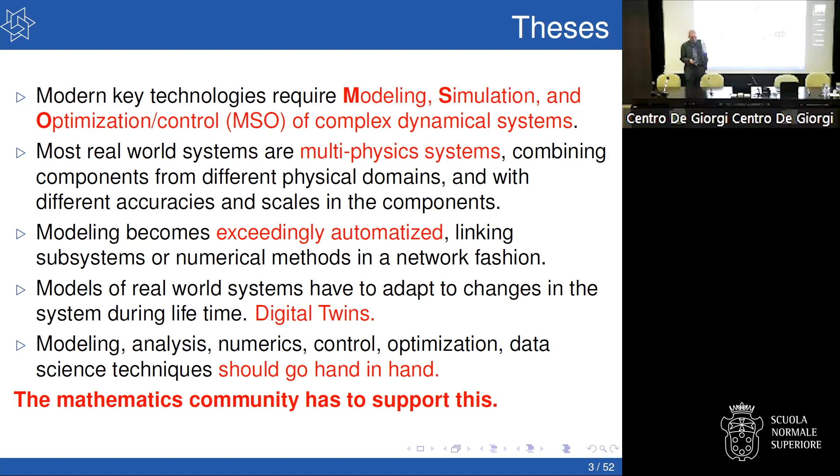In order to deal with all these things, I think we need to work more together in the math community between modelers, analysis, geometry, computational methods, and also data methods. And my obsession is that I try to convince the mathematical community to work together. So here's one of my favorite topics. We have nowadays the energy sector, and in particular, since exactly 1 year ago, it has become really important, even more important than we thought.

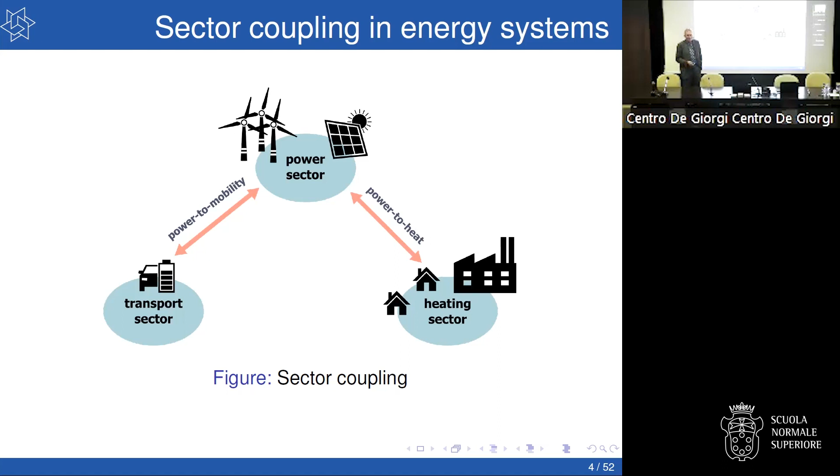That is, we have to couple different energy sectors. So there is all the green energy, wind and solar power, and then there's a classical sector like power plants with gas or coal or whatever, nuclear. And there's also nowadays, with all these electric cars, the transport sector. And this doesn't fit together. So at the moment, there are lots of obstacles that we have to overcome.

So what are the challenges? First of all, we all want our energy to come out of the socket, so the energy supply should be there. You have to couple different energy sectors, wind, solar, and they behave totally differently. Maybe not so much in Italy, but in Germany, the sun is not always shining as much as in Italy. They have different modeling accuracy, and they live on different time scales.

So the electrical system lives on a millisecond to second time scale, while gas transport has a time scale of a bike, roughly a speed of 15 meters per second. And we have to deal with increasing randomness, because the wind and solar power system becomes random, and decentralization. If everybody has a solar panel on the roof, they are not only consumers of electricity, but also producers of energy.

And so we need dynamical approaches. At the moment, for example, the power system is completely stationary. It's run on a stationary model. Okay, so we need new mathematical approaches. And I will not talk about the power system. I will talk about the gas transport system, even though we've essentially stopped transporting a lot of gas, but it's much more developed, and also there are nicer partial differential equations there.

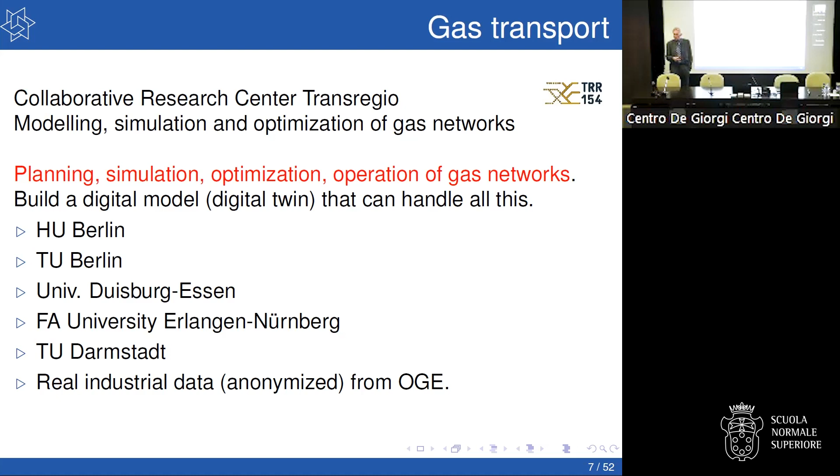So this is a joint research project, a big one, together with 5 universities, like a center of excellence, between Humboldt University, Technical University, University of Erlangen-Nuremberg, TU Darmstadt, and we get the data from an industry partner. It's Open Grid Europe, which is one of the biggest gas transport companies in Europe.

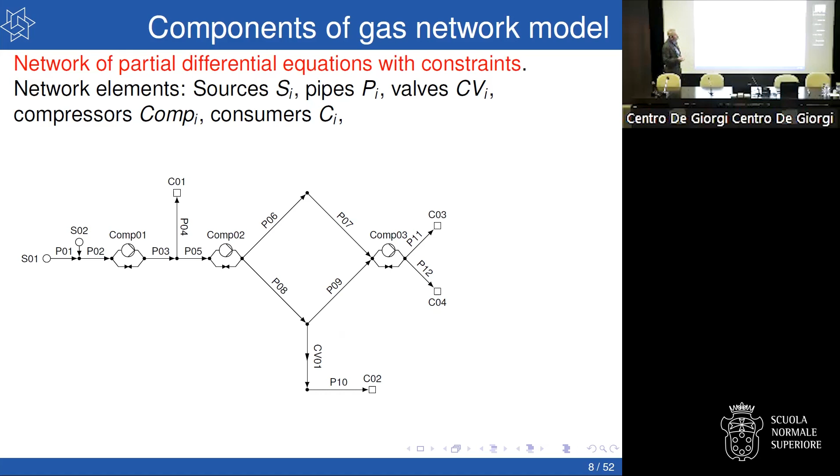So what is such a gas network? A gas network is a network of partial differential equations with constraints. You have these pipes, and on each pipe you have gas flow. And you have sources, so somebody pumps in gas and it's transported. You have compressor stations because due to friction, the gas gets slower and slower, and then you use energy to increase the pressure. And you have valves, so it becomes discrete. You can close and open a valve. This continues, and you have the consumers, which at the end have it in their household to heat.

And you also have something else, to bring the modern world into the game. This is a compressor station. It's a huge building at the border between Germany and Czechia. And what this whole thing does is nothing else than, based on certain parameters, it follows a curve, the curve for the pressure and the mass flow in the pipes. So it increases or decreases the flow.

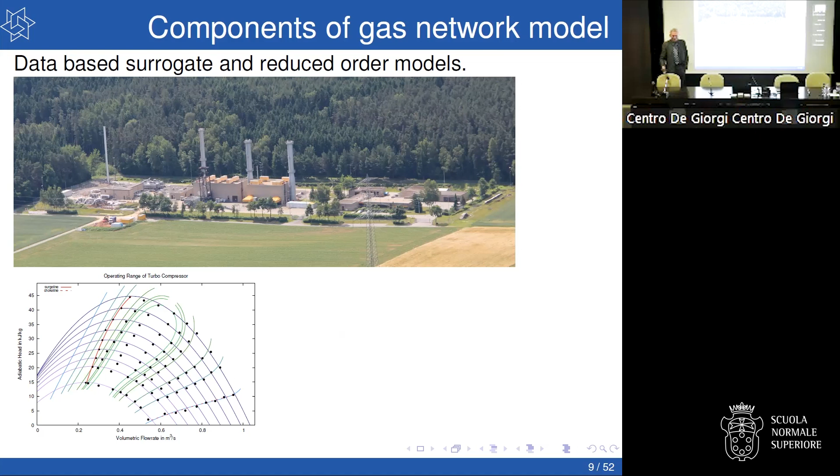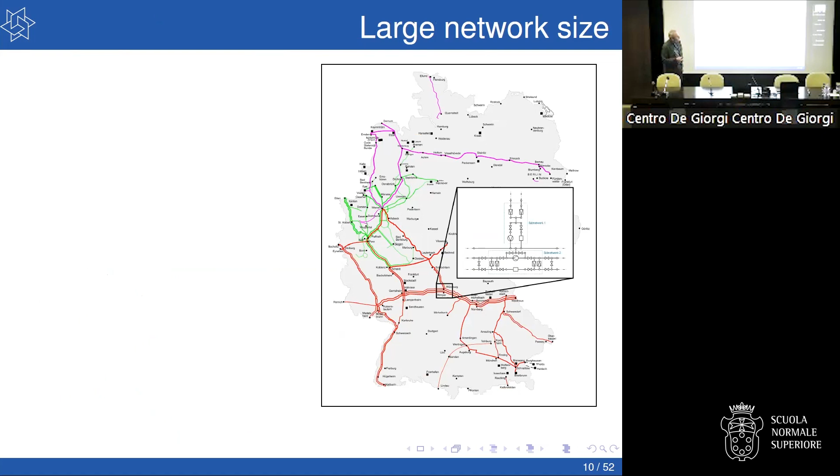And then you have the network, the transport network. These are the big lines in Germany. Each node in this graph is another graph, and each node of that is another graph. So if you think about it, it's a really huge, complicated network. And on each of these nodes, there's a partial differential equation. Now you ask which partial differential equations.

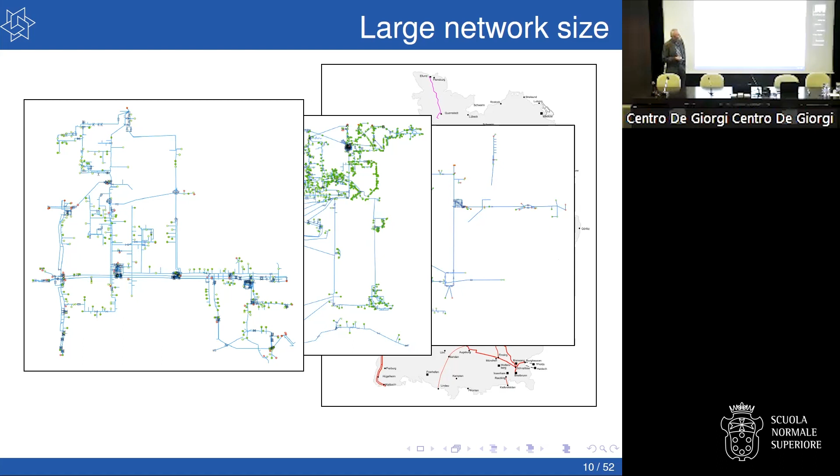But if we went to 2025, we would have hydrogen. A lot of the green energy produces green hydrogen, which in principle you could add into the gas networks. And then you would have to make sure that it doesn't demix, and then you would have to do it all in 3D.

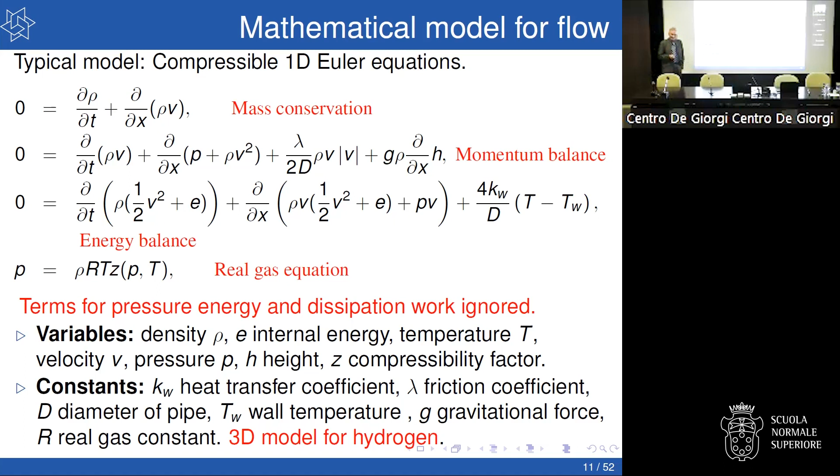So the hydrogen and the methane doesn't mix. So this is a system of partial differential equations, which is on every node, plus all the other components. So we're getting worried, right? And actually what we are doing is we not only have the full model that I showed you, but we also have simplified models. So we have this so-called model hierarchy.

So on top of the Euler equations, then we also have the isothermal Euler equations. We assume temperature is constant. We say that the space derivative of rho v squared and rho v cubed is small. So then we get to a slightly simplified model. We could assume that d/dt rho v is small, simplified nonlinear equation. This is not done, by the way, by asymptotic analysis. It's just simplification by dropping terms.

And you could look at the stationary model, and you could also say that this real gas factor is constant, and then you get a completely algebraic model. And then on top of all this sits an optimization method which uses discrete optimization, and they can't even deal with this algebraic equation. So it's approximated by piecewise linears. So this is a model hierarchy, and there's always an isothermal one. And every element of a node is modeled via this hierarchy.

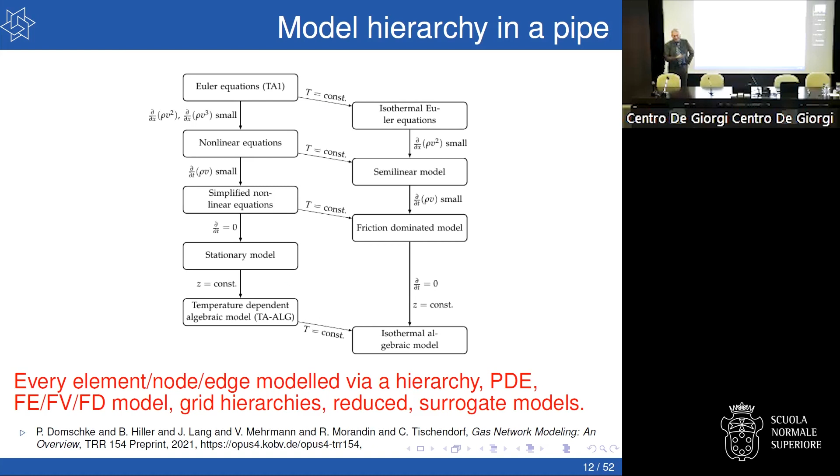So it's a PDE, one of these, and finite element, finite volume, or finite difference approximation in space, and then in time. And we also have reduced models. So if you are interested, there is a huge paper with all the details of all the equations and all the quantities in there, and it's permanently updated. So this model hierarchy is there. So it's a great playground.

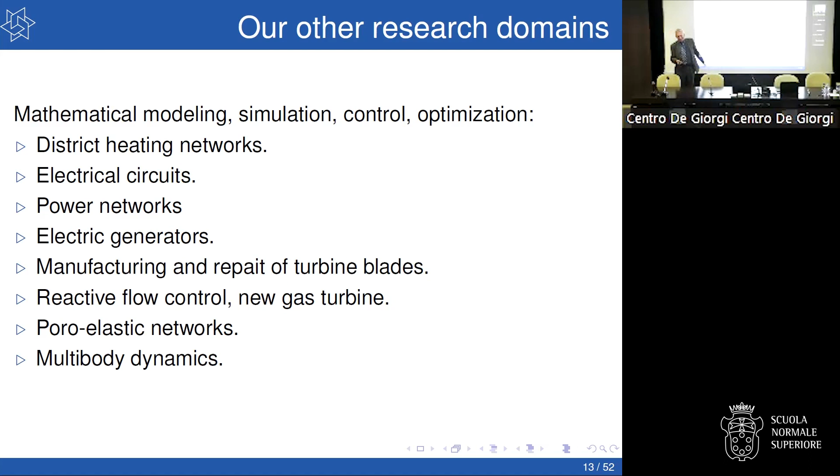We're not only doing this gas transport, but we also look at district heating networks. Then you have incompressible Euler equations, which adds another difficulty. We also look at electrical circuits, power networks, electrical generators, and manufacturing repair of turbine blades, and brain models, and multi-body dynamics. And you look at this and you say, come on, you can't work in all these areas, right? The nice thing is the mathematics for all these can be put in one framework. And this is what I would like to talk about.

So a couple of years ago, we sat in our coffee room, it was shortly before Christmas, and we said, let's make a wish list. What do we want our model class to look like? So we want it to be close to the physics, for closed systems, so separate from the environment, and open systems. We want representation so that we can couple different parts over different physical domains. And the model class should have, we are mathematicians, nice algebraic, geometric, and analytical properties. And the model should be easy to analyze concerning existence, uniqueness, robustness, stability, uncertainty, errors, and so on.

I started out as an algebraist, and I like normal forms, so I also added that we want to have local invariance principles, and it should be good for discretization, so space discretization, time discretization, and we want to do simulation, control, and optimization. And the question is, is there such a jack of all trades? That's the English word. In German, we have a wonderful animal. It's called the eierlegende Wollmilchsau. It's an egg-laying wool milk sow. It's a perfect animal which gives you everything that you need. And so I like this word, and it fits very well to this.

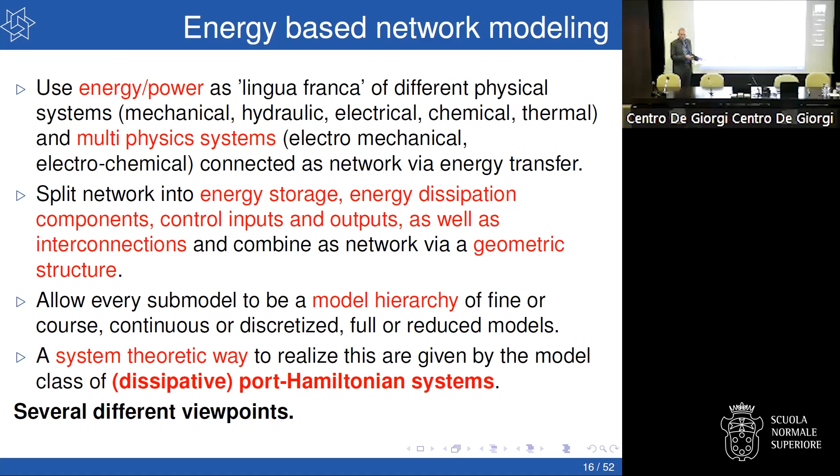And this gives you this so-called class of dissipative port-Hamiltonian systems. And I will give you 2 major viewpoints of this, a geometric one and a differential equation one, and I will show you how the 2 are interrelated. So a classical port-Hamiltonian system as it was defined in work by Arjan van der Schaft from Groningen. And there's a nice book here, a course that you can download, where this is all written up to model all these different components in this way. It has the following form.

It's a nonlinear ODE, x dot equals J of x and t, and J describes the energy flux between storage elements, and J is skew symmetric, or skew Hermitian in the complex case. Then we have a minus R, and R is a positive semi-definite matrix function which describes energy loss or dissipation in the system. And then we have the gradient of an energy function, that's the Hamiltonian. And it describes the distribution of internal energy among the energy storage elements. So that's the classical Hamiltonian concept.

And then on top of the classical Hamiltonian framework that we know from elementary courses in physics, you have ports. Ports are inputs, so U is input. And then in front of the ports, we have one time B minus P and the other time B plus P. And so the input and the output have the same dimension, and you may even have a term which goes directly from the input to the output that's split into its symmetric and skew symmetric part. So I wrote it down here in the ODE setting, but all these could be differential operators.

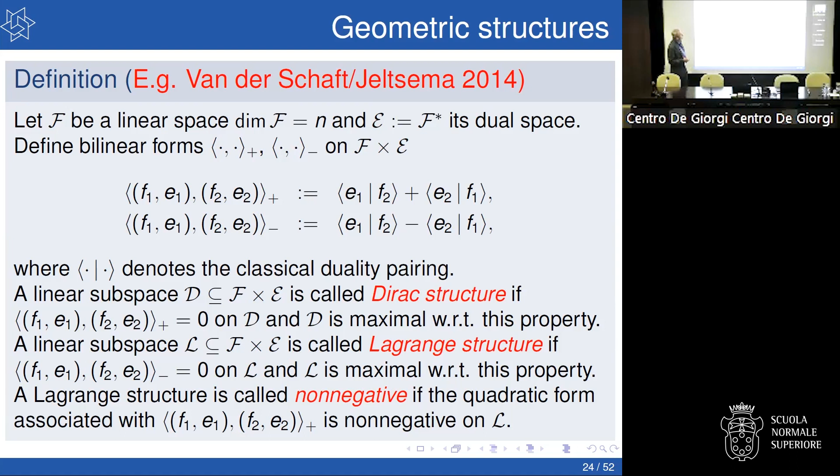Then you can make an abstract definition of this stuff that I wrote down in a differential equation in the following way. So I have linear spaces, a state space X, a space of resistive flows. These are the flows which are run through a resistor or dissipating. A space of external flows, these are the ports, and you take their dual spaces. And then such a Dirac structure looks like this. It's a Cartesian product of X and its dual, the ports and its dual, and the resistive part and its dual.

And the Lagrange structure, which describes, so this describes power transportation from one part of the system, or energy transportation from one part to the other. And the non-negative Lagrange structure is just a part of this resistive system here that describes energy dissipation.

And abstractly, you could write such a port-Hamiltonian system like this. It's X dot X, FP, EP, FR, ER. There exists something in the dual formulation such that XX star is Lagrangian and FR, ER is resistive. So this is a way of writing it with relations and with form. And this can also be done in the nonlinear case with a modulated structure so that the functions depend on the state, and then you get what I wrote down there before in the differential equation framework.

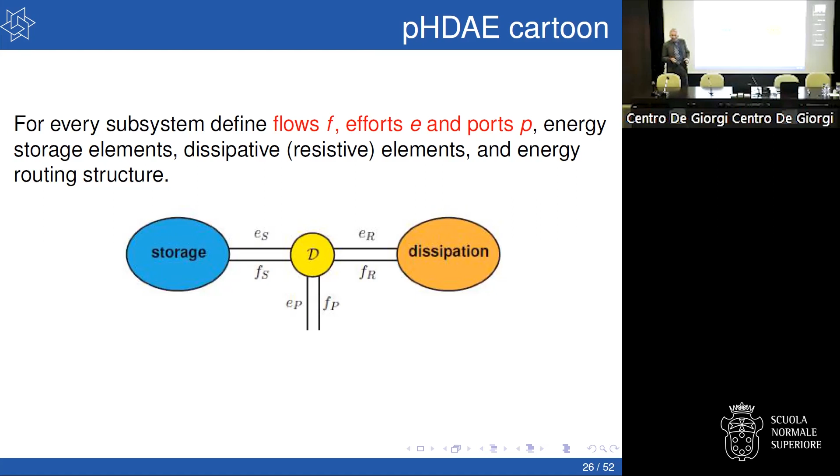And there are the resistive efforts and flows, and then the port efforts and flows. And so this is how you build the system. There's always components, and you interconnect them with such a geometric structure. And that you do in a Lego-like fashion. So let's recap this. This was the definition that I had before. Same definition. And now, how are they related?

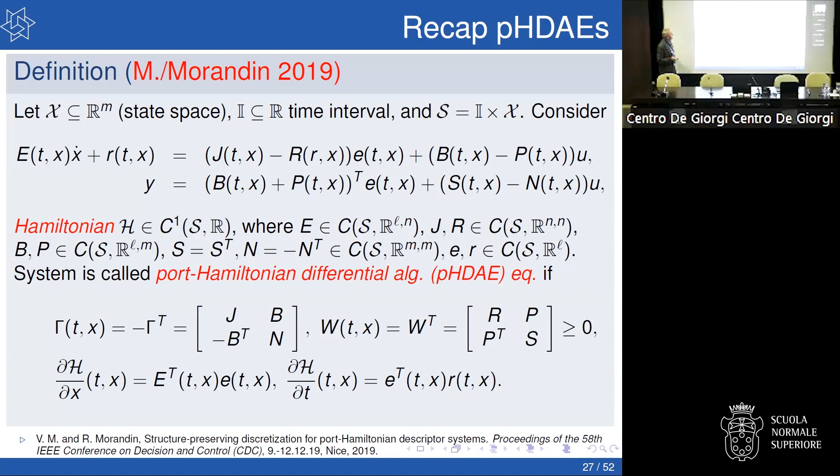So you can show that given an autonomous PHDAE in this form, you define the flow fiber, which is the storage fiber, the port fiber, and the resistive fiber for all x, where the flow fiber is described by E of x times, so I don't have a t because it's autonomous, is the tangent space at x. That's the storage fiber. The same thing for the port flow fiber and the resistive fiber. Then you divide your F, your flows, into these three components, and your E's into these three components.

And then the corresponding Dirac structure associated with the differential equation that I wrote down, there is all these F and E, which live in Vx cross Vx star, which satisfy such a relation. And you see here, gamma is skew-symmetric. You have a skew-symmetric matrix which maps the F's into the E's.

And this is a Dirac structure, and you define Fs to be Exx minus Exx dot, Es to be Ex, Fp to be Y, Ep to be U, and Er to be minus W times Fr. And then you get exactly the differential equation framework. And this inner product between the effort and the flow, this is really the power balance equation. So you have this geometric framework, you can translate it into the differential equation framework, and the physics in the background is all there.

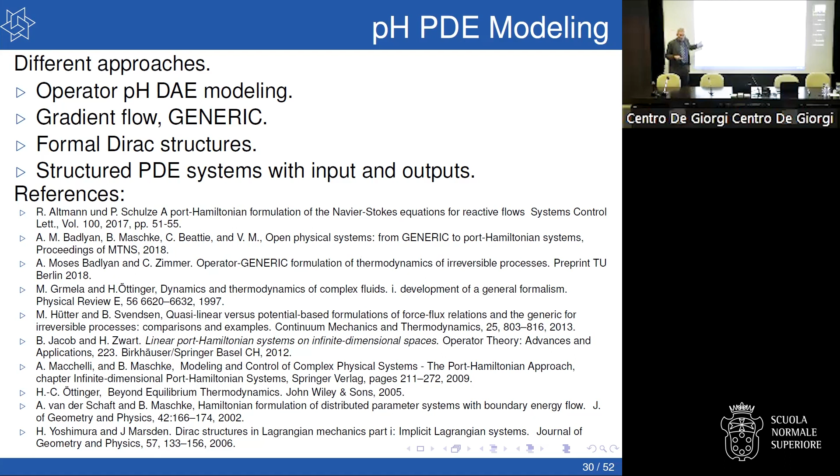So then you want to go to PDEs. Now, there are different ways to do this. So first of all, you could just say, okay, these matrices are now operators, linear or nonlinear operators, and that's one way. Then there is, in the thermodynamic community, a thing called GENERIC. These are gradient flow systems, which would give you a different way. You could also look at formal Dirac structures, or you could look at structured PDE systems with inputs and outputs. And I can provide the slides, so there are references.

So in the linear case, it would look something like this. You have a generalized state variable Z, you have operators J and R, and you have the gradient of the Hamilton function, and you have an input operator and an output operator, which is a formal dual. So J is skew-adjoint, R is self-adjoint semi-elliptic, and the input and the output are connected in this way. And E of Z is the relative energy, which is only a conserved quantity if there's no dissipation and no entropy. And if you want to do thermodynamics, you have to incorporate entropy equations.

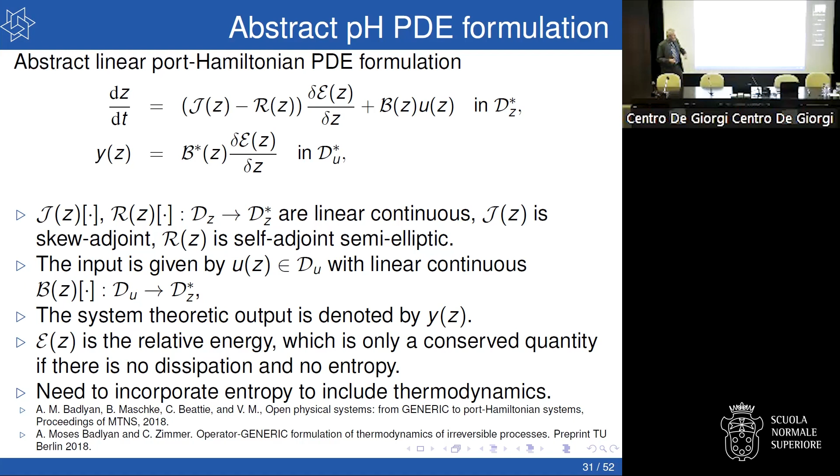So there's some work how to rewrite this. So now let's go back to our Euler equations in the gas transport. Are they port-Hamiltonian in this framework? No. Why not? Well, between Euler and what is now used in gas transport, people have been dropping terms. So these red terms, which is the pressure, energy, and the dissipation work, is usually not considered.

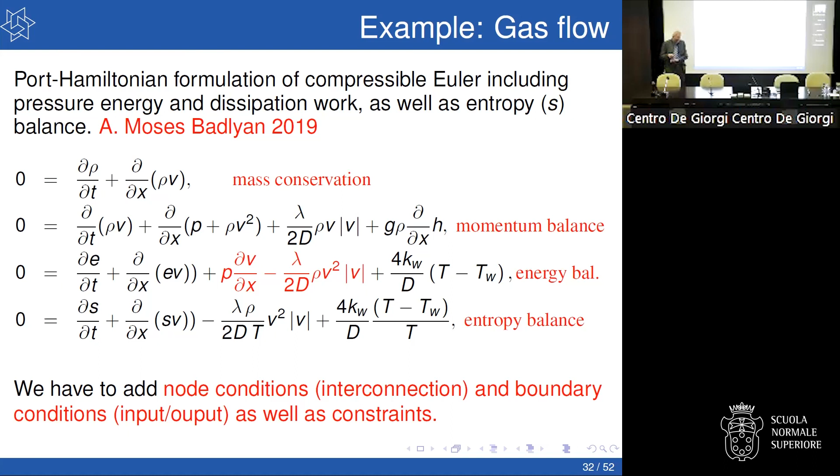But they give you the symmetries. So if you leave them out, the nice symmetry structure is destroyed. And also you need to add an equation for the entropy balance. So if you write it like this, you can prove that it fits into this framework perfectly nicely. We have to add node conditions, so for the interconnection, and boundary conditions. And the boundary conditions, I will talk about this in a second. The boundary conditions are a problem.

So there is no uniform way to deal with the boundary conditions. So classically in PDEs, we want the boundary conditions to make sure that our system is well posed, that we get a unique solution or things like that. Here, the boundary conditions also should reflect this geometry and this symmetry structure.

So, for example, in the gas flow model, the wall temperature boundary condition, so this temperature at the outside, that could be a classical boundary condition for the PDE, or it could be that I want to interconnect with the environment because all these pipes heat up the environment, and then it would be an interconnection variable. So this is different. And the inflow and outflow boundary conditions, they're controls and observations, but they can also be used for interconnection if you have two pipes that come together, and then you put a continuity condition there.

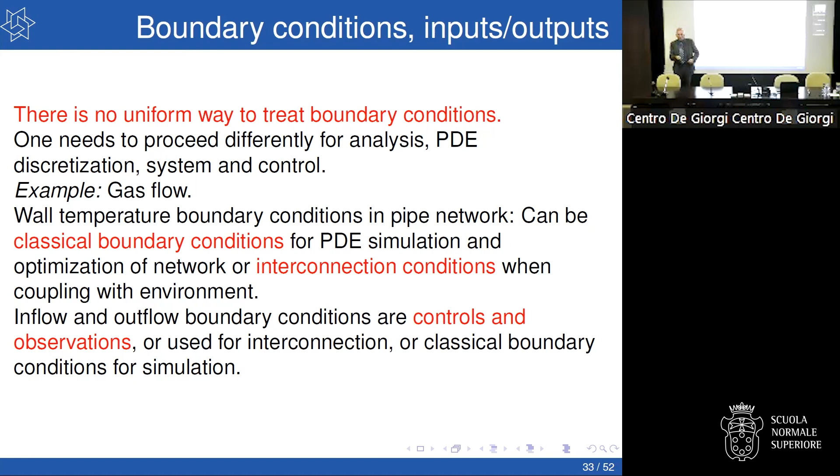Let me go to space and time discretization. And space discretization is surprisingly easy. You do whatever you do for your PDEs anyway, finite elements, weak formulations. Galerkin keeps the structure. So that's easy. But you could also, that is currently a hot topic, use exterior calculus. So go to the representation in forms and use the de Rham cohomology.

And the hard part is, again, the boundary conditions, that you get them right in this framework. That's what we are currently working on together with Andrea Brugnoli, who is a postdoc at the moment. But there are also hybrid approaches which mix this exterior calculus and the classical framework. I'm not going to talk about this part, but it's much easier than the time discretization.

The time discretization is so difficult because most classical ODE or DAE methods do not preserve the energy or the dissipation inequality. So you need something like symplectic methods to keep the geometry. But unfortunately, to preserve the Dirac structure, you would have to use some symplectic methods. And to preserve the constraints, you would have to use something which is called stiffly accurate methods. And there is no symplectic stiffly accurate time discretization method. So you have to do something special.

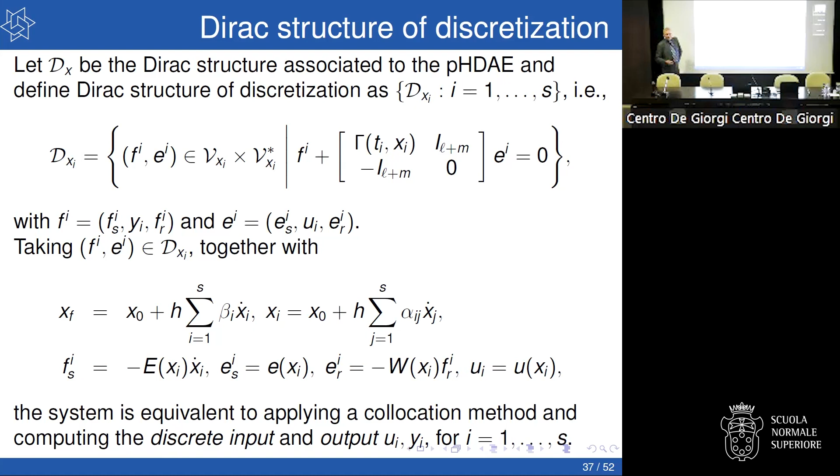So in this last term, you could have trouble, because if the discretization has the wrong sign in this O of h^(p+1) term, then you could get a little bit of dissipation or gain a little bit of energy. But if you use the Runge-Kutta method with positive coefficients, then you really get that this is less than or equal to 0. And if the Hamiltonian is quadratic, then it's even exact. So that's also nice.

I can't resist to put in a little bit: does it help us anything for the linear algebra? And the answer is, when you do a space-time discretization method, you get a nonlinear system or linear system. And it's a large-scale problem if it's a discretized PDE. And does the PHDAE structure help?

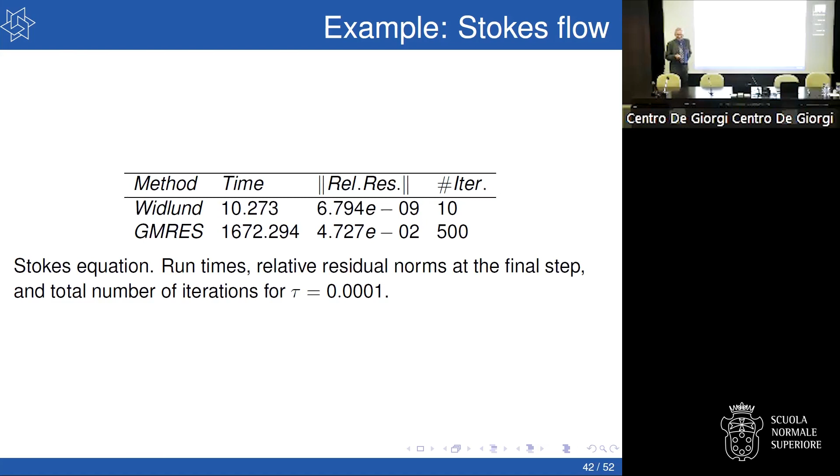So here's an example. This is Stokes' equation. These are the runtimes. If you run Widlund's method, this is what you get, versus the classical non-symmetric generalized minimal residual solver. Here we get an accuracy of 10 to the minus 9, and here it's 10 to the minus 2. You need 10 iterations and 500 iterations. It gets better if the step size is smaller. So if you get more accurate in space and time, then the iterative method gets better because the skew-symmetric part is getting smaller.

So, to come to the end, we've been using all this machinery now in the gas transport. And so we do a little bit more than the usual space-time adaptive methods that you use in numerics. We also add now the model. So we allow that you can switch the model, going to 1D Euler or going to simplified models. We go to space discretization, finer or coarser, and time discretization, finer and coarser. We have determined all the sensitivities when you go from one model to the other. So we have a factor there that we can use in the error estimation.

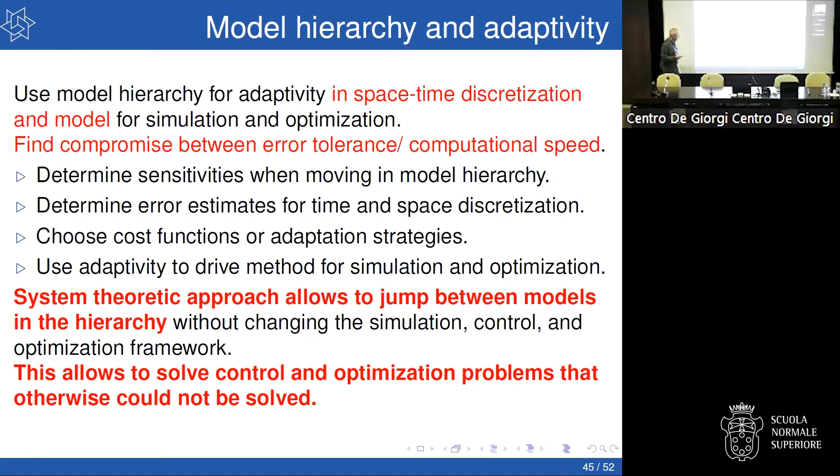And then you choose a cost function or an adaptation strategy and use this adaptivity to drive the simulation or optimization methods. And the system theoretic approach allows you to jump between the models. So inside every node, there's a model hierarchy, but the outside doesn't see it. It sees the same inputs and outputs, and it doesn't see which model you're using. And then you can make the system faster.

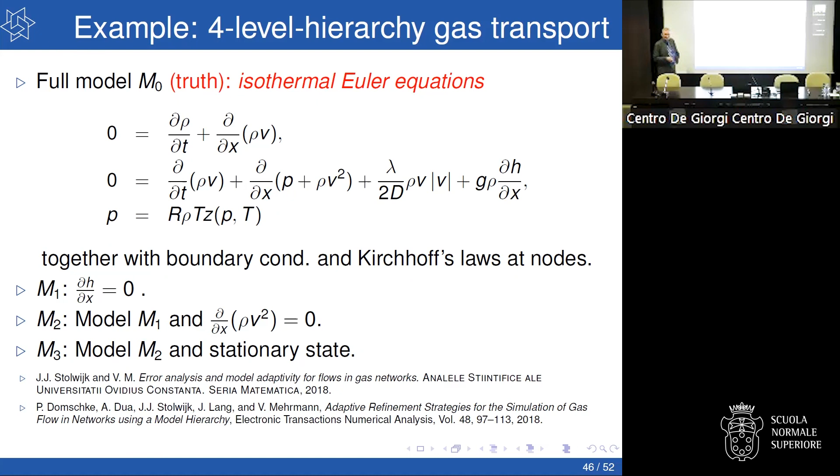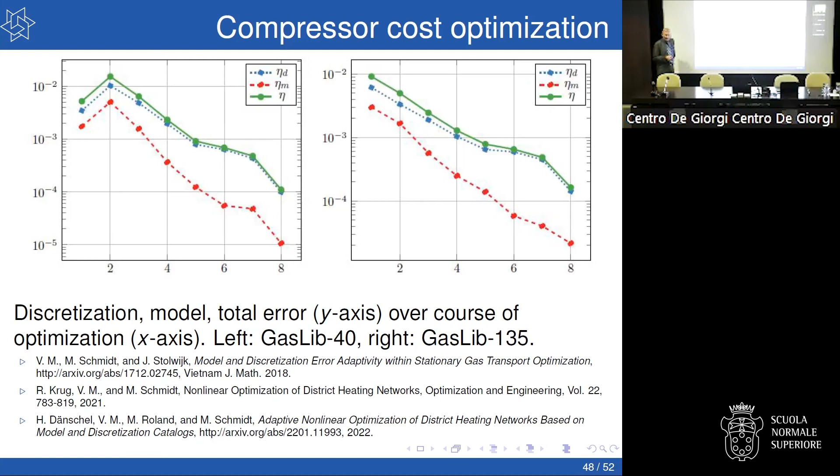So you can see, D is a discretization, eta D is a discretization error. This is a stationary model. M is a modeling error, and eta is a total error. And so you can play with the errors. So you say you want to go to 10 to the minus 3. Then you do 2 switchings in the model and 4 switchings in the discretization. These are real models from the industry partner, these gas models. And what are the conclusions from that? Actually, we could solve optimization problems that never could be solved before with this method.

So what about our wish list? I mean, there's a lot of things to be done, but in a way, with the port-Hamiltonian DAE systems, you can get close to answering all the wish points. So it's like Christmas. So that's why I like it very much. I'm very enthusiastic about it. But there are lots of things to do.

For example, real-time control. All this uses high-performance computing. If you want to do this in real time in a power system network, you have half a second to do the control. And with half a second, you better cook down the model as much as possible so that you can do the solutions. We don't really know how to put uncertainty and stochastics into the model nicely. We have already worked on delay, because after all, you need some time to calculate the control, and that takes some delay in the time, and that is delay equations.

The right function spaces: actually, we're going for the de Rham cohomology. We're going for this geometric stuff because there the function spaces are well understood, but we don't know whether this really is the best possible way. Error estimates, we are working on this, preconditioning for the linear systems. And a big topic right now is data-based.

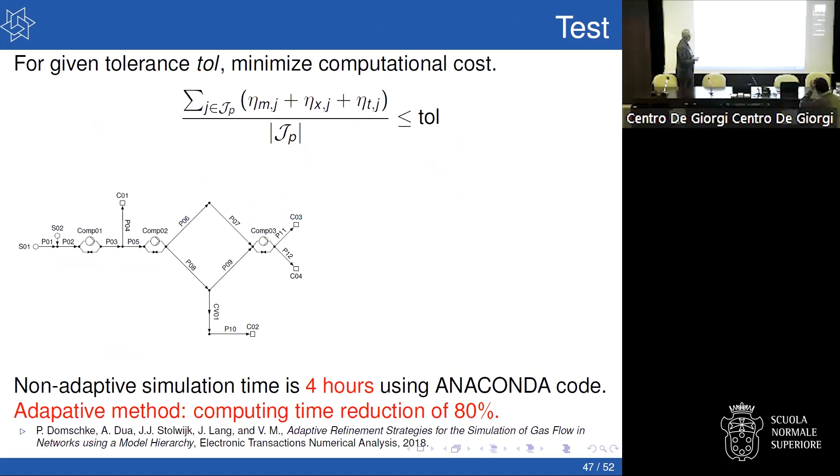This is really done by the engineers in the past. Oh, this term is ugly, just drop it. It's small. We do experiments, we see it's small, it's only 10 to the minus 1. And that's not good. So that really destroys the structure. Yeah. But we have one example. I mentioned poroelasticity.

They're funny. So this is a model which is really a second order model, but it has rho times the second time derivative. And rho, the density, is low. So if you look at the quasi-stationary limit that is usually considered, this second order term is gone and it's not port-Hamiltonian anymore. If you go back to Biot's original modeling, the second order term is there.

So you keep it because it's second order. You go to first order, you add the velocity as an extra term, it's port-Hamiltonian, and then you can drop it there and you get this kind of structure. So what I'm saying is, in the classical modeling approaches that we see, it pays a lot if you go back to the original models and don't look at what the engineers give you, what they have been using the last 10 years in their classical engineering framework.

And actually, in most cases, the old guys, 50 or 70 years ago, they came from a Hamiltonian point of view and they had it right. So it's just, this is the world that we are living in. This is a model that everybody is using, but that doesn't mean that it's a good model. Okay, thank you.